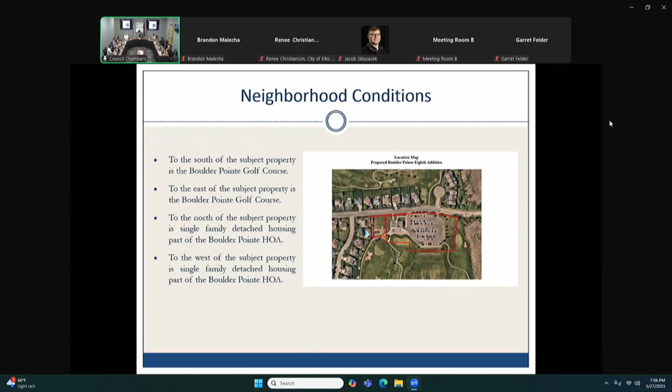Based on the plan submitted, the 2 residential units do meet the minimum lot area, but they're just slightly shy of the required minimum lot width. One is proposed at 80 feet, one at 73.83 feet. That is why a PUD is necessary.

The timeline works so it could be at the next meeting if everything is submitted in time. Another public hearing notice would be sent to property owners within 350 feet of the property, so there will be another notification if there is another public hearing.

Setbacks are required in the R1 zoning district as follows: 30 feet in the front yard, 10 feet on the side, 25 feet if it's a corner lot, and 30 feet in the rear yard. Based on the plans, the proposed development appears to meet the setback requirements. The height requirement is 35 feet in the R1 zoning district, and based on the submitted plans, it does not appear to exceed the height requirements.

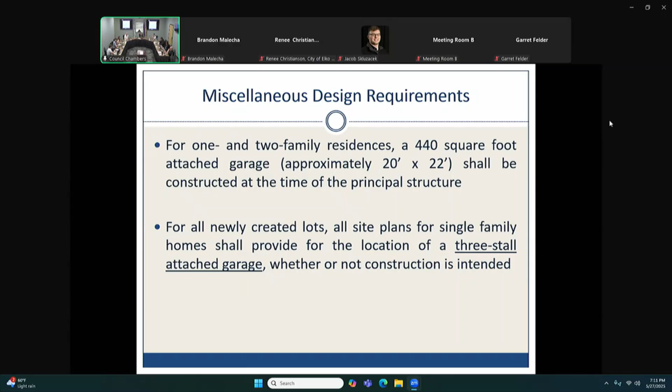The proposed development borders Glenborough Drive on the north side of the development. Glenborough Drive is an existing minor collector roadway, the purpose of which is to collect local traffic and convey it to major collectors and minor arterials. Minor collectors serve relatively short trips at relatively low speeds, and their emphasis is focused on access rather than mobility.

The purpose of a minor collector is to provide a balance of mobility and land use access function. They serve trips that are entirely within the city and connect neighborhoods and smaller commercial areas to the larger network. Minor collectors are shorter in length with lower volumes and lower speeds than major collectors.

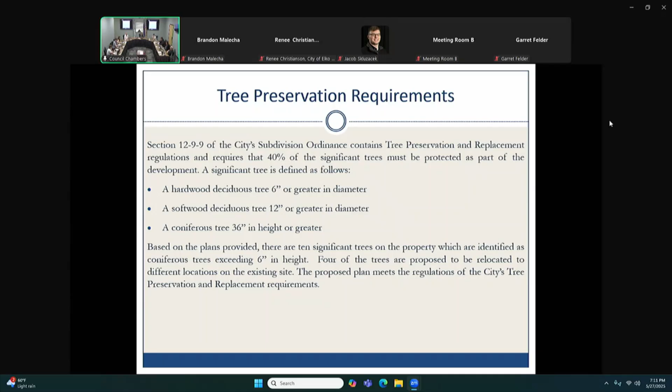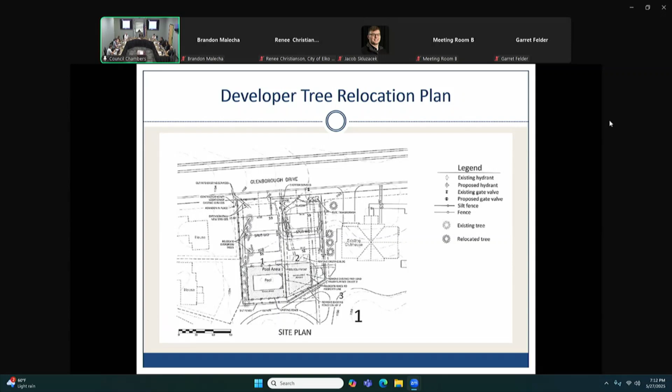City code requires that B618 curb and gutter be constructed with new development. However, that is inconsistent with the existing curbing along Glenborough Drive. So the city is saying the existing curbing may remain if it is in fair or better condition, as determined by the Public Works Director.

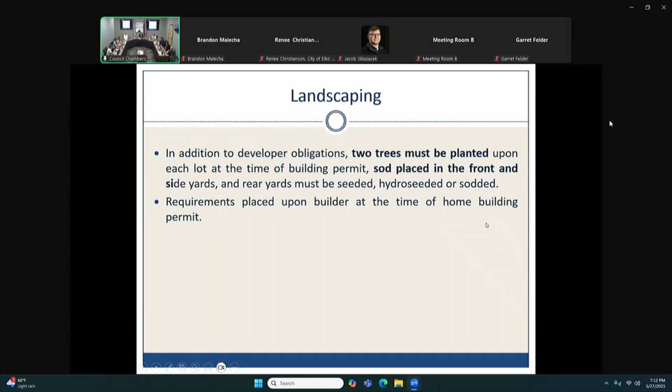Concrete aprons to the right-of-way are required by city code. The concrete aprons must be called out on the plans with a note that the final location is to be shown on certificates submitted with building permits. Code-compliant curb with driveway openings and aprons must be provided if the existing curbing is in less than fair condition.

The city's transportation plan recommends that sidewalks or trails be constructed along all minor collectors, major collectors, and minor arterial roadways. There's an existing trail along the north side of Glenborough Drive, and the city's Parks and Trail Plan does not identify any additional trail or sidewalk corridors on the property other than those already existing. No additional trails or sidewalks are required or proposed based on city code.

The city's subdivision ordinance requires that 8% of the land be dedicated for the purposes of public parks or playgrounds. This was originally platted in 2000, and the park dedication was previously satisfied for the development. State statute therefore does not allow the city to require park dedication for what has already been received for the same property. Therefore, no park dedication will be required for the proposed replat.

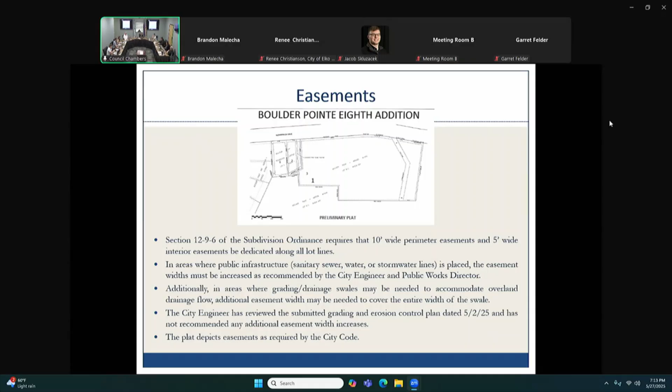It is noted that the closest city park is Boulder Heights Park, which is classified as a neighborhood park. Neighborhood parks serve specific neighborhoods within the city. Boulder Heights Park is the newest park in the city, and it's approximately half a mile from the proposed development, separated by 275th Street East, an existing local road. Other nearby parks include Pete's Hill Park, an open space, historic Elko Park, and Big Windrose Park.

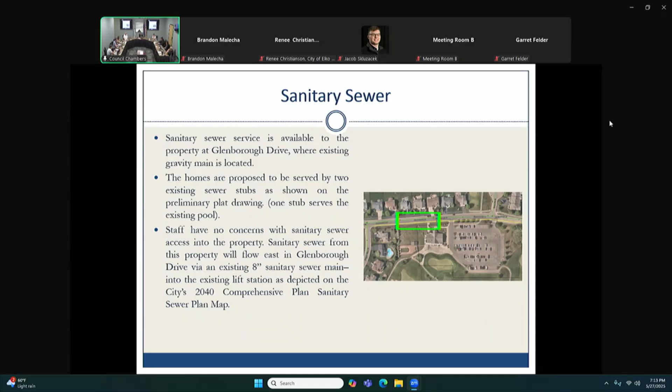Additional comments from the city's engineer, public works director, police chief, fire chief, building official, city attorney, and the relevant school district are included with the presentation here tonight.

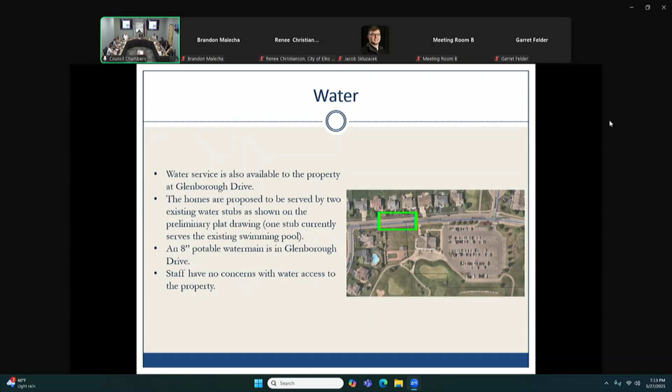Staff's recommendation is for the applicant to apply to rezone the property from PUD to a new PUD district, due to the following reasons. Development of the property as R1 is generally compatible with the surrounding land uses. The proposed development containing 2 residential lots on 0.57 acres meets the intent of the city's comprehensive land use plan, which guides the property as low-density residential.

The required density is 2.5 to 10 units per net acre. 3.51 units per net acre are proposed. Noting that Boulder Pointe 8th will be subject to the R1 suburban single-family residential district, except as follows.

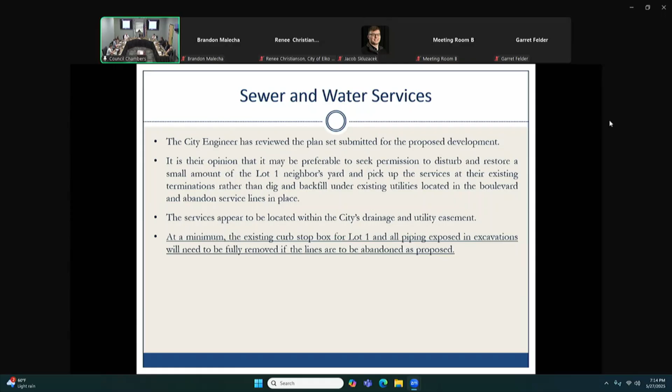Those variations in minimum lot width and minimum lot size are listed here. From the R1 85 minimum lot width down to 73.83 feet at the smallest, and minimum lot size 12,000 square feet down to 11,177.5 square feet.

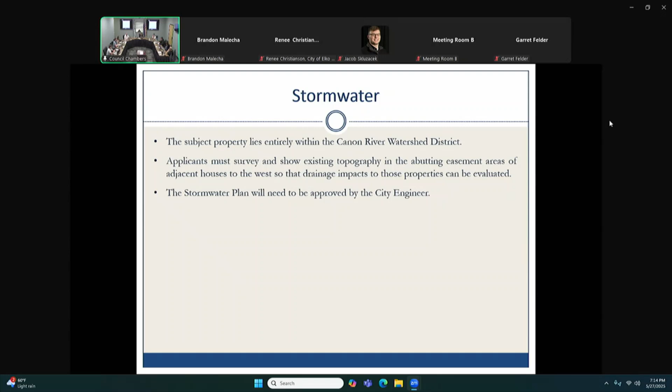The plat should also be developed in accordance with the following plans received by the city, subject to the conditions noted on the red line plans dated May 20th, and subject to the recommendations of the city engineer as contained in his memorandum dated May 20th.

Staff recommend the following conditions for the preliminary and final plat approval of Boulder Pointe 8th Addition, containing 3 lots on 4.59 acres. First, the property would be required to be rezoned PUD due to the proposed lots not achieving the city's minimum lot size and width.

The applicants must indicate how they intend to achieve the intent of the city's PUD zoning district. The city council must then approve the PUD zoning conditions.

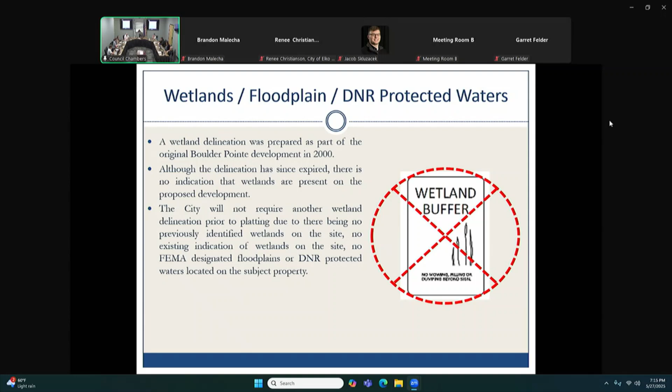Thirdly, perimeter drainage easements must be dedicated on the final plat, along with easements covering the sanitary sewer and water mains serving the development. Grading and utility plans will also need to be approved by the city engineer and public works director, and the requirements of city code pertaining to essential services must be satisfactorily met.

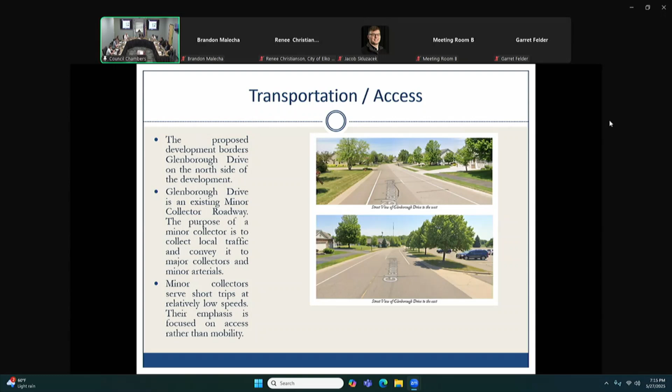The developer shall also work with the postmaster to find an acceptable location for mailboxes. Approval is subject to the city engineer comments and staff redline plans, also subject to recommendations of the city attorney. The developer must enter into a development contract with the city of Elko New Market at the time of final plat approval.

Construction plans must be revised to include a year-round drain tile system and tile connection stubs that can be used for sump pump connections.

At a minimum, the existing curb stop box for Lot 1 and all piping exposed in excavations will need to be fully removed if the lines are to be abandoned as proposed.

The side yard and perimeter grades must be detailed with spot elevations at property corners and high-low points, as well as drainage arrows and percent grades to facilitate building permit review and final lot grading approvals. Finished grades at key points on the perimeters of the house and the pads must also be provided.

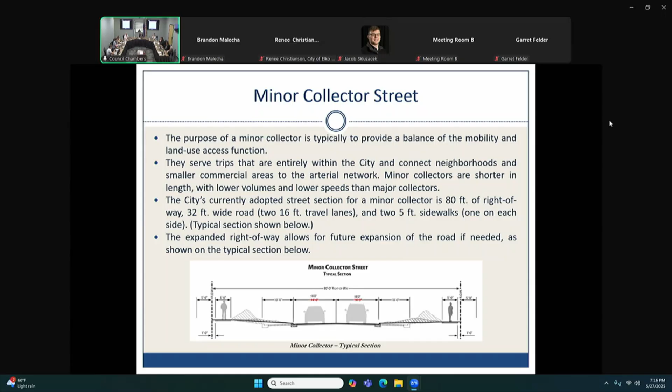Survey and show existing topography in the abutting easement areas so that drainage impacts to those properties can be evaluated. And lastly, existing curbing may remain if in fair or better condition as determined by the public works director.

Notices of the hearing were mailed to all properties within 350 feet of this property. Notice of the hearing was also published in the newspaper, on the city's website, and on social media. Staff encouraged the public to submit comments prior to the meeting.

So at this point, staff will recommend that we open the public hearing. Anyone wishing to address the commission via Zoom may raise your hand using the Zoom feature. Staff will individually call on those waiting to address the commission, and you will be unmuted. Those in person will be called on first. Once unmuted, please state your name and address for the record prior to addressing the commission.

State your name and address. Once you have finished addressing the commission, you will again be muted. When all questions and comments have been received, the public hearing will be continued to a future meeting for the updated rezoning application.

Okay, Madam Chair. All right, thank you, Jake. Thank you, Renee. All right, I'd also like to make the comment, I'd like to be mindful of people's time. You know, keep track of like 2 minutes if you could keep your comments so we can keep everybody on track and hear everybody out.

So I will open the public hearing at 7:22 p.m. Please come up to the podium and state your name and address for the record if you'd like to comment on the Boulder Pointe 8th addition.

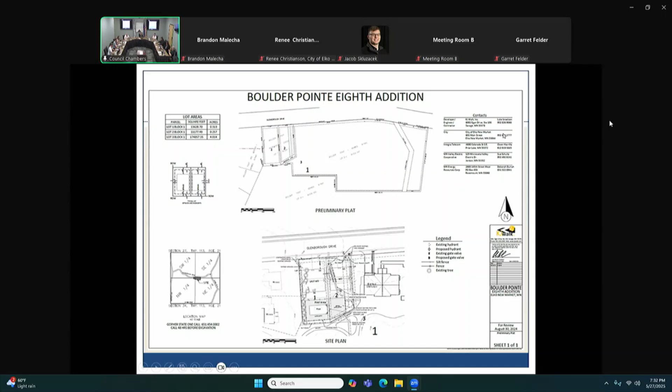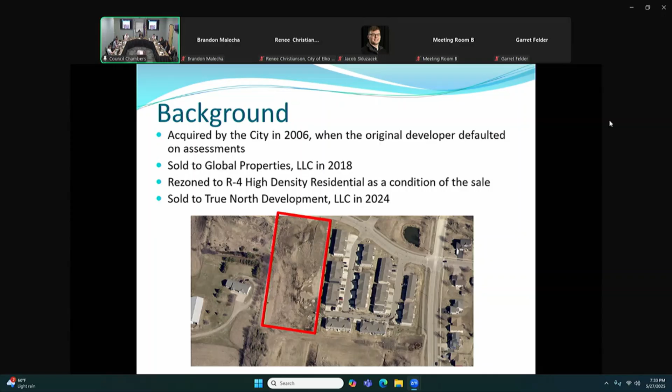No additional sidewalks or trails are required for the proposed project. An existing trail is located along the north side of James Parkway. No identified sidewalk or trail corridors are identified throughout the subject property on the city's 2040 Parks and Trail Plan.

Land dedication of 8%, or a cash contribution of 8% of the undeveloped property value, is required at time of development for the purposes of public parks. Input will be sought from the Parks Commission regarding whether they will seek cash in lieu of park dedication for this property. Staff notes they reviewed an apartment plan for the site in 2016 and recommended cash in lieu of land dedication.

Nearby parks include Wagner, which is the city's largest park, Whispering Creek, and the Eagle View School facilities, which are not city-owned.

10% of the site shall be usable open space, with either active or passive uses counting toward this requirement. The developer must identify 13,896 square feet within the development to fulfill the requirement. Square footage of the play area depicted is unknown based on the plan submitted. Any proposed playground equipment, as mentioned earlier, will require city approval for safety and durability.

The city engineer has responded to staff's request for review, and his comments have been incorporated into this presentation and his city engineer memorandum dated May 20th. The Public Works Director has also responded, and his comments are included in the memorandum. The Building Inspection Department recommends no less than 20-foot setbacks between buildings, which is achieved in the proposed plans. There are no comments from public safety at this time, and the fire chief has not yet responded for review. Staff notes the following general comments associated with the applications.

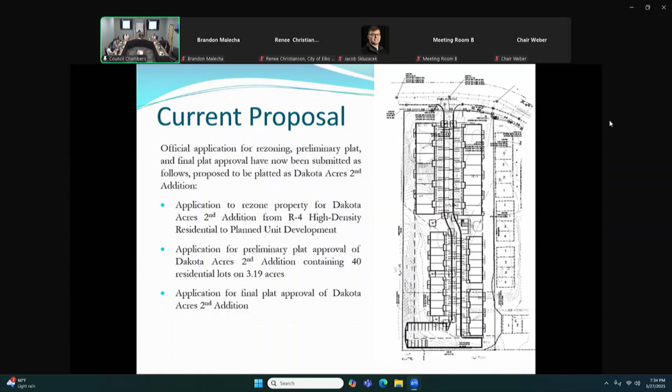Development of the property as R4 high-density residential is generally compatible with the surrounding land uses. The proposed development, containing 40 units on 3.19 acres, meets the intent of the 2040 Comp Land Use Plan, which guides the property as high-density residential, requiring a density of 10 to 30 units per net acre. 12.54 units per net acre is proposed.

Townhomes and condominiums containing more than 8 attached units are a permitted use in the zoning district. PUD zoning will be required for townhomes containing 8 or fewer attached units, and also for those townhomes that do not achieve the city's minimum requirements. Further input will be sought from the city's Parks Commission regarding the desire for land versus cash in lieu of land dedication at their June 11, 2025 meeting.

The landscaping for Dakota Acres Second must exceed the minimum city landscaping requirements by no less than 6%, shown at 8%. Garbage receptacles shall be stored within garages or fully screened from view. The developer shall work with the postmaster to find an acceptable location for mailboxes. Ground level patios with privacy fences shall be constructed on all adjacent rear yard patio areas, and an in-ground irrigation system is required for the entire property.

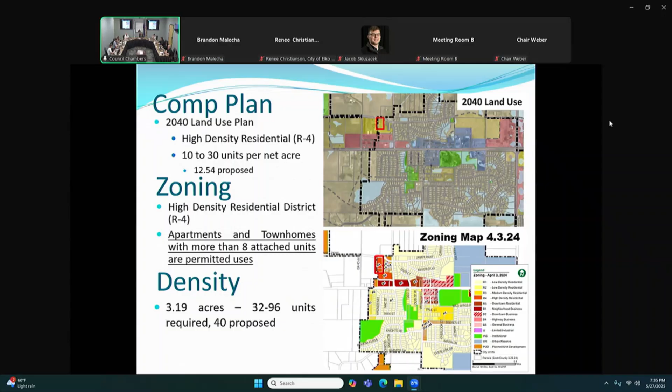Staff notes the following conditions related to the preliminary plat. The exterior of townhome dwelling units shall be composed of a minimum of 25% Class 1 materials on the front facades. A lighting plan is required.

Perimeter drainage and utility easements must be dedicated on the final plat, along with easements covering sanitary sewer and water mains serving the development. Grading and utility plans will also need to be approved by the city engineer and public works director.

Parking shall be provided based on the feedback received from the Planning Commission regarding the PUD zoning at the December 17th meeting. The plan submitted depicted a total of 135 spaces, of which 58 are enclosed.

The plan submitted lacks 1 required guest parking space. Additional support is required for the reduction of the additional guest parking space.

Ownership over all the common elements of the development, specifically the private road and play area, shall be under the ownership of just one association.

Any connection between the proposed private drive Oriole Street to the adjacent townhome development, although not currently proposed, would require an agreement and cross easements with the adjacent homeowners association.

The developer also must identify a minimum of 13,896 square feet for open space within the development. The plan submitted depicts an outdoor play area in the middle of the proposed development with unknown dimensions.

Staff are asking the Planning Commission to hold a public hearing for rezoning and the preliminary plat as required by Minnesota state statute. Following that public hearing, staff will be seeking a recommendation from the Planning Commission regarding the official applications for rezoning and preliminary plat approval, submitted as follows: proposed to be platted as Dakota Acres Second Addition.

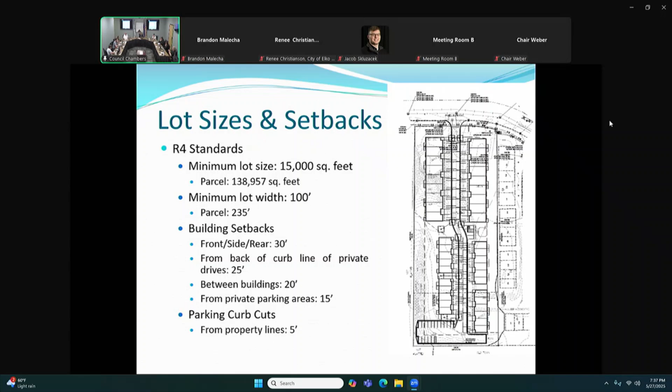James Miner, 25955. I just want to make sure the same builder is not building these townhomes as built to last. I just did about $6,000 in repairs to my unit. Sorry, I'm a little emotional because it's a little irritating. Just about every unit in that complex has had to have a fix of over $1,000 in damages. When we went after the builders to have them come through for a 1-year walkthrough, we were ignored.

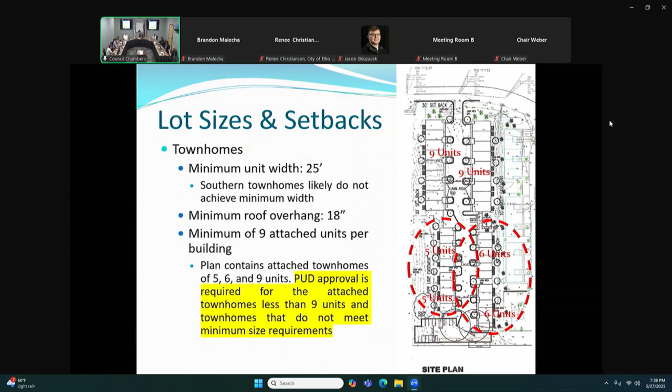It's almost got to a point where a military lady moved in. COVID took her out of the military, and the government is actually seeking action against them. We're trying to see how far it goes before we actually do anything. It is wrong. They screwed a lot of people, a lot of pissed off people there, excuse my language.

But we didn't deserve it. We've been left in the dark. You guys have heard a lot of our calls. I know we've talked to you a lot.

Our land isn't even finished yet. They haven't done what they said they were gonna do with ours, and you guys, I would force them to sell the property and not allow Larry to build anything. Because he's already proven his partners aren't worthy, and the roof damages that are coming up on most of the buildings - I had $6,000 in water damages on my house, and it was built in 2022.

It's not right, and there's nothing that I can do. My insurance is looking into it to see if I can go after them, but I don't even know who to go after. Bear Construction doesn't exist. Dave doesn't answer his calls. Larry doesn't answer his phone.

Joe, good luck. We took the HOA from a negative place, and we actually have a surplus now. We did it right. We had to raise the dues that they refused to, because you can sell a house a lot cheaper or a lot better with low dues. They weren't enough to actually cover costs of the HOA. We're gonna be raising them again to replace driveways, fix the roads that they put in.

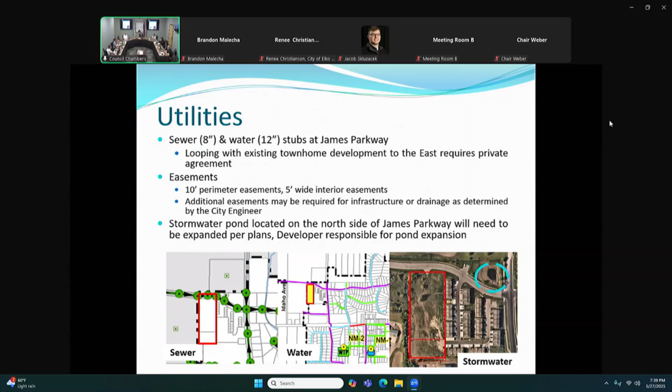Honestly, any conjunction of the new build and us - yeah, you pay us $100,000 to fix every unit in that HOA, and yeah, we'd consider it. Other than that, there's not a chance that they will have any access to that road. That's it. Thank you, guys. Thank you.

Maria Fregis, 25490 Texas Avenue.

I have a question. It was stated for the Dakota Acres Second Addition that there was a previous wetland delineation that showed no existing wetlands on site, but it's considered expired. I was curious if the LGU, local government unit, or the Soil and Water Conservation District made the decision to not need another wetland delineation, or if that was done administratively.

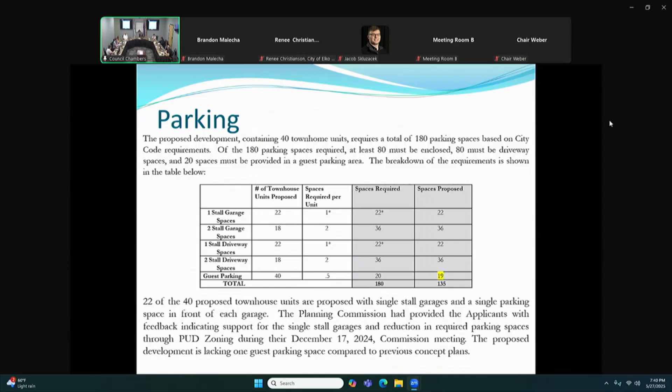The city is the LGU, so it was done in consultation with our wetland advisors. Okay, just curious, because there is a 5-year expiration date on those decisions, since wetlands can change over time, so I just was curious if that was made by the LGU or not. Yep. Okay, thank you. Thank you.

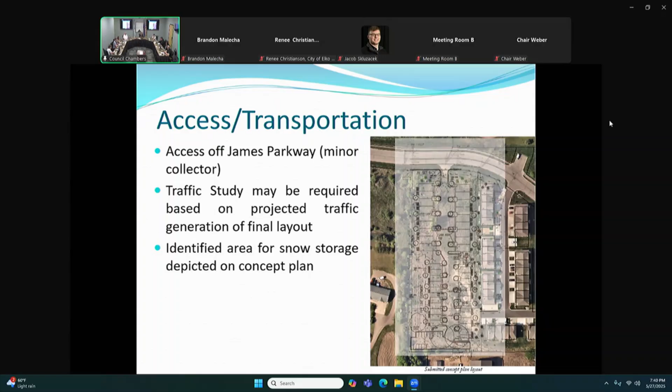Anyone else like to comment on Dakota Acres Second Addition? Please come forward, step to the podium, state your name and address for the record. Anyone online? No. Okay, I will ask a third time. Anyone want to comment on Dakota Acres Second Addition? No. Okay.

Developers are here if they wanted to add anything.

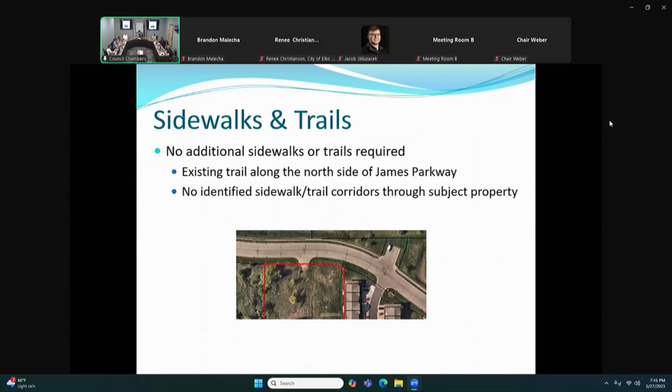My name's Alyssa Cheeky, 3250 90th Avenue, Northfield, and I'm one of the partners in True North Development. He left, I wanted to answer some of his concerns, but I just want to make it clear that none of the previous owners from the first development are involved in this one. Also, regarding the association dues, that will be handled by a third-party company, so we won't have that same issue that happened last time. I'm happy to answer any other questions.

All right, I will close the public hearing at 7:42 PM.

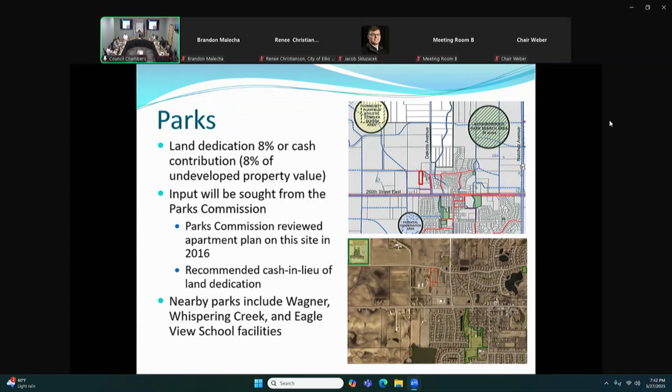At this point, we're asking the planning commission to recommend the applications for rezoning from high-density residential to planned unit development, and consider the application for preliminary and final plat approval for Dakota Acres Second Addition. So moved. Are we gonna have a discussion on anything? Don't we vote and then have a discussion? No, discussion first. Okay.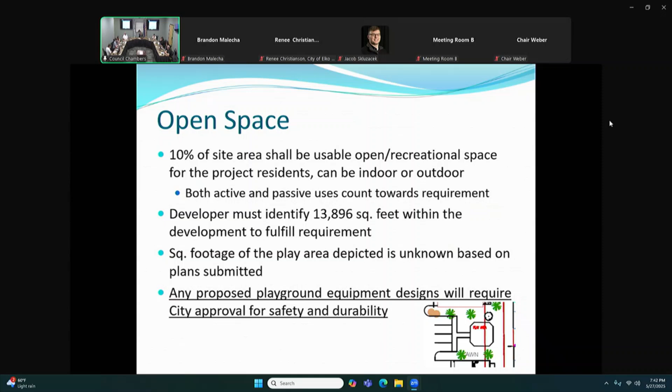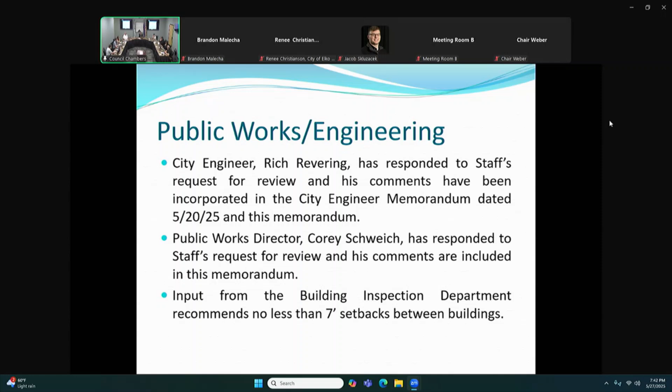I appreciate the fact that this is a different housing style and option that we currently don't have in the city. Housing is a struggle for many people right now, and affordability is a crisis, and I appreciate that we have a housing style that isn't a huge single-family home with a three-car garage. I also appreciate that the developer came forward and explained that the original developers of the townhomes directly east of this proposed development aren't part of the equation anymore, because hearing what was going on raised a lot of concerns for me, so I appreciate that was clarified.

I like that they reserved some area for turnaround if the garbage trucks or whatever come in and out. I hope they paint those areas as no parking, because I could envision people wanting to park when they see a big open spot. Is there a reason in the northwest corner they can't add one or two more spots there? That was actually the one they subtracted, in the southwest corner. So they could more easily add one in the south. Yeah, just wondering about the same parking area.

They notched this out, what is that for? Oh, that's so they can get the snow stuff out. That's the old plan, that was the one they presented. Oh, okay, so they have a more recent plan than that. Okay.

I'm a little confused, I don't know if I was on the commission at the time. So the developer with the existing townhomes is the same person? There's three different property owners, or of the other development that this was a portion of, I believe. The first builder built two houses, then went out of business, and then developers bought it from the city years ago and developed part of it. Okay.

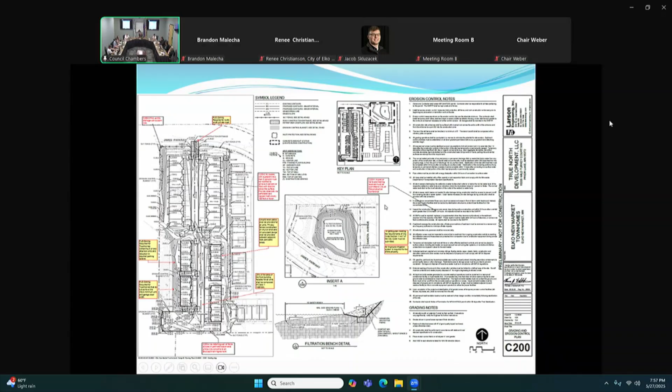Miscellaneous items: neighborhood meeting. The city did request that the developer hold a neighborhood meeting prior to this meeting to introduce the project to the neighborhood. It was held last Wednesday at the library. Some city staff members attended the meeting, which was hosted by Tamarack Land Development, and resident questions at the meeting related mostly to drainage, the ghost plat showing the adjacent properties to the north, screening, traffic, and the location of a planned roadway connection to the north. And the county wanted to point out that any work done within the county will require a permit from Scott County.

So the ghost plat - the preliminary plat shows a conceptual layout of the approximate 80 acres to the north of this parcel. A ghost plat is an additional requirement laid out in our city code, submitted with each proposed development for the purpose of ensuring proper roadway alignments in the event of future development, but it does not indicate city support or approval.

The concept development plan showing properties to the north does not indicate approval or support of the specific layout, but rather shows the potential for future development based on planned roadway and utility alignments within this proposed development. Staff recommended, and city code requires, that the developer provide this ghost plat to demonstrate that cohesive development between the parcels could occur. City growth only occurs when a willing seller sells land to a willing buyer. The timing when a landowner wants to sell is not controlled by the city. The city plans for and prepares for growth in order to promote orderly development.

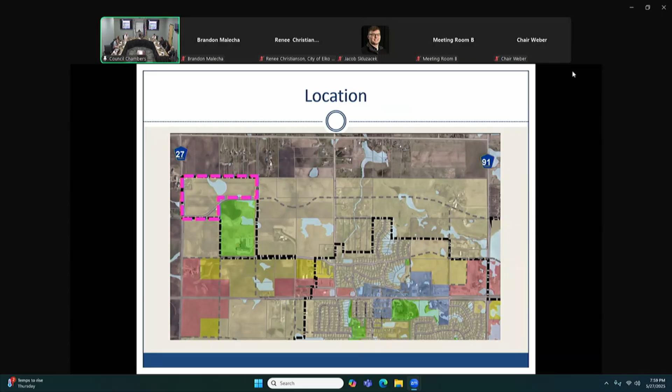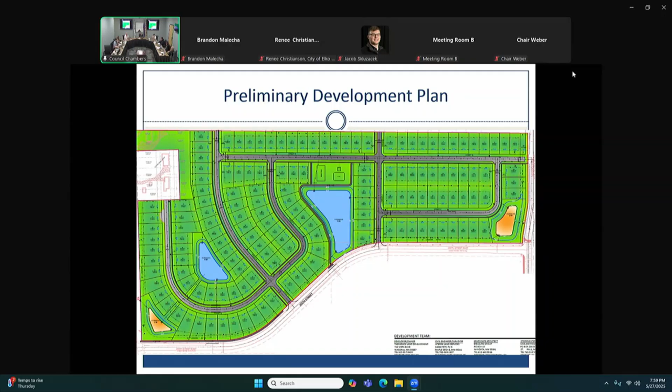Continuing on with traffic, staff has no knowledge of major operational issues at the existing County Road 27 or County Road 2 intersections. The police chief indicated that they do not see a lot of accidents there. There is an existing northbound right turn lane and a southbound bypass lane on County Road 27 at the intersection with 255th. Turn lanes allow vehicles to safely decelerate before turning without obstructing traffic, and bypass lanes allow vehicles to bypass other vehicles that are slowing down or stopping prior to turning. The Scott County Highway Transportation Services was notified of the proposed development and has provided comments.

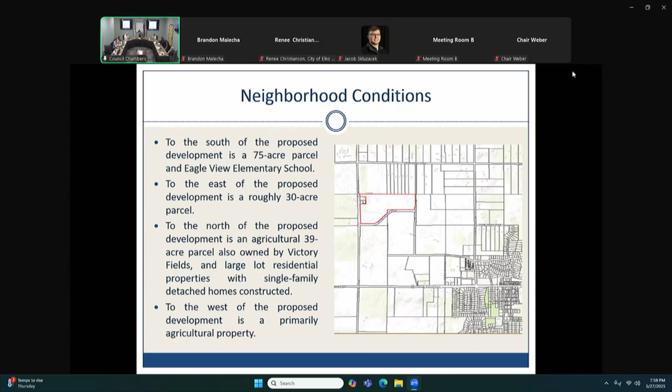Traffic generation or impacts to the county road system were not identified as an issue. Staff consulted with the city's traffic engineer regarding impacts of the development, and the following feedback was provided after running the anticipated traffic through traffic modeling software. With the 2024 traffic volumes and anticipated traffic added to the intersection, they did not see a concern with the capacity of County Road 27 or at the intersection. Acceptable intersection levels of service are anticipated during peak hours.

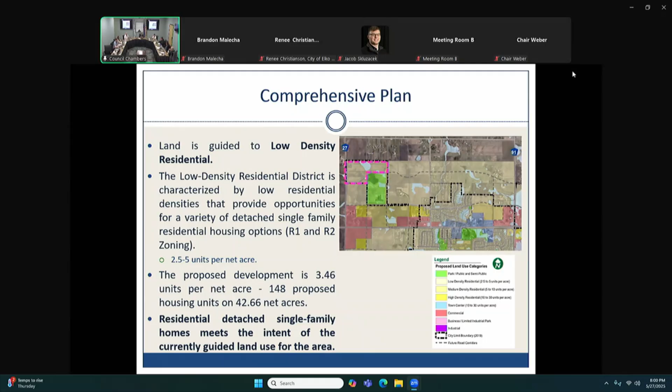The modeling assumed all traffic from the development would go to and from the intersection in order to be conservative, and assumed none would go out to the east. Scott County's 2040 comp plan shows their capacities for a two-lane highway are well above what this development would add, which aligns with the county not having any comments or concerns on this.

Additional comments: the city engineer provided us a memo, and his comments are in there. The Public Works Director's comments are incorporated here. The City Attorney didn't have any comments right now. The Police Chief did want to add just another caveat on that intersection - to keep the view unobstructed at the corner of 27 and 255th to ensure proper sight lines for traffic.

If any traffic control devices are needed in the neighborhood, specifically at the intersections of Street A and C, which is kind of to the south near 255th, use yield signs in favor of stop signs. The fire chief didn't have any comments, and the building official didn't have any comments.

The school district - this is anticipated to add roughly 81 students to the school system once it's fully developed, which is great for New Prague. Newmarket Township board members were notified of the application and have not submitted any comments to the city. All of Scott County's comments were included in a letter, and they are attached to this report.

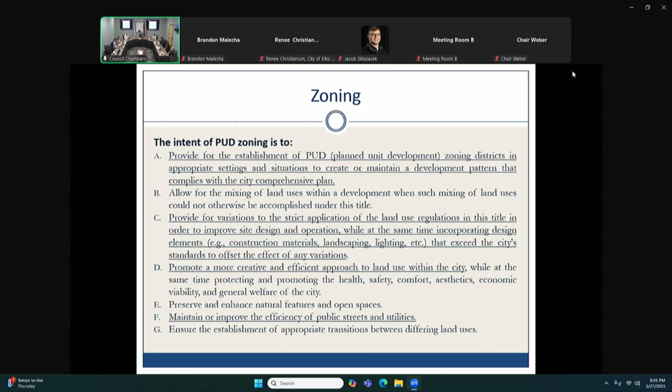So the actual request to the Planning Commission tonight is an application to rezone 50.87 acres to PUD zoning, and an application for preliminary plat approval of Highlands at Eagleview containing 148 lots on 50.86 gross acres.

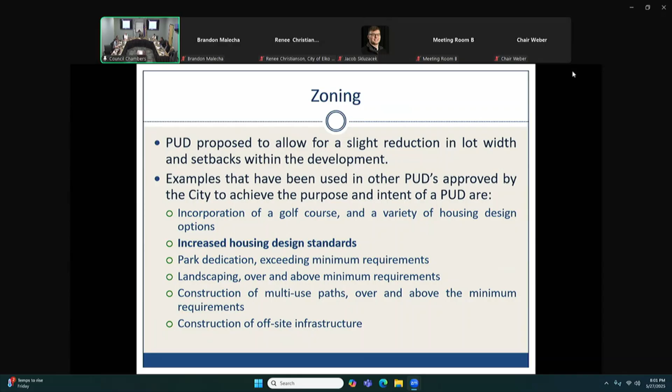So staff recommendation, bear with me here. Staff recommends rezoning the property to PUD. It is consistent with the comprehensive plan, which guides to low-density residential. The proposed use of the property for single-family residential development is compatible with present and future uses of the land area. The proposed use and development of the property complies with performance standards contained in the subdivision ordinance and zoning, except as specifically identified in the PUD. The proposed residential use of the property can be accommodated with existing public services and will not overburden the city's service capacity at all. Traffic generation by the proposed development is within the capabilities of the existing infrastructure.

Related to the request for preliminary plat approval, staff would also recommend approval for the following reasons. Development of the property for single-family residential homes is consistent with the land use plan and meets the density. The proposed plat is consistent with the purpose and intent of the 2040 comp plan and standards contained in the city's zoning and subdivision ordinance, except for deviations specifically approved through the PUD. Development of the property as single-family residential is compatible with adjacent land uses.

Staff recommend approval of the request for preliminary plat with the following conditions. Preliminary plat approval is subject to the approval of all wetland applications, including wetland boundary and type concurrence, and approval of the wetland replacement plan if required. The developer must enter into a development contract with the city at the time of final plat.

The preliminary plat is issued for a period of 1 year and shall become null and void without further action from the Planning Commission or City Council unless the final plat is filed within 1 year of the date of the City Council granting preliminary plat approval. Preliminary plat approval is granted in accordance with the Highlands at Eagle View's preliminary development plans dated 5/2 containing 23 sheets, the Stormwater Pollution Prevention Plan, and the Stormwater Management Plan.

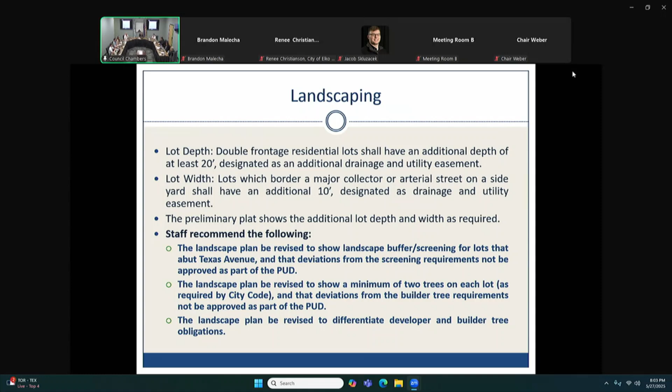A trail bench should be graded for a future trail along Texas Avenue. If it can't, it should be graded at the back of individual lots with a trail easement. A combination of parkland dedication and cash contribution will be required to satisfy the park dedication requirements.

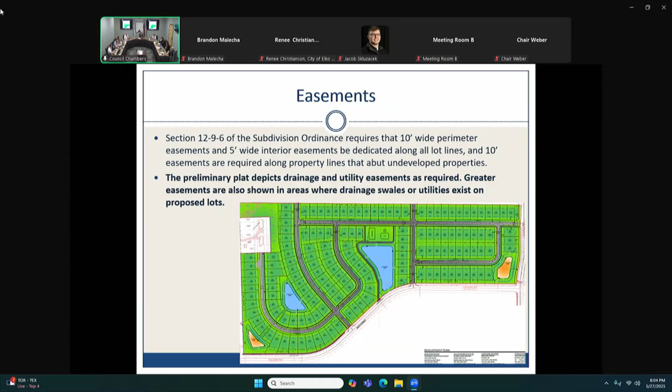I'll add a little context to this one. Condition 13 requires a fence to be constructed on the northern boundary of Street E to mitigate concerns of headlights for the neighbors to the north. This came up quite a bit at the neighborhood meeting last week. Staff's recommendation is to construct a fence so it's immediate - we don't have to wait years for the trees to grow, and it won't cause a problem for the neighbors to the north.

As Jake said earlier, if there's anybody online, please raise your hand and we will get to you after everybody in person speaks. We're ready to open the public hearing. I'll open the public hearing at 8:19 p.m. Please step up to the podium, state your name and address for the record if you have anything to comment regarding Highlands at Eagle View.

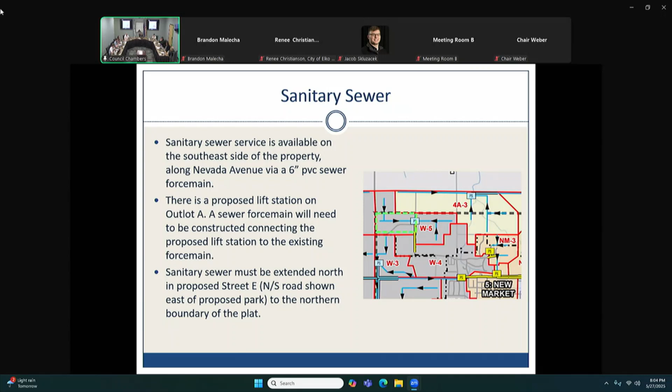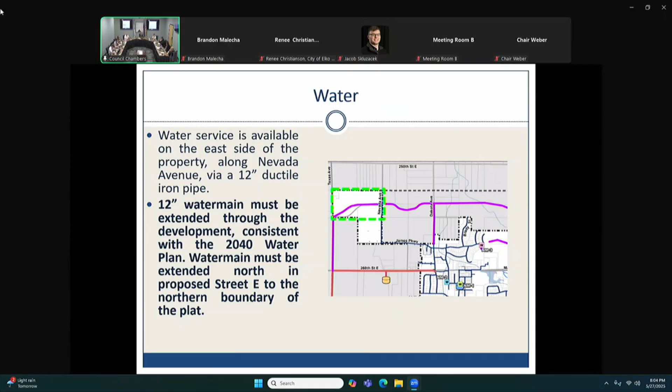Hi, my name is Cheryl Fregis, 25490 Texas Avenue. Can I walk up to that quick? Absolutely, thank you. I know you guys were there last week, correct? And I specifically talked to you about this, this is where it's coming out. That's Texas Avenue, so my house is right there.

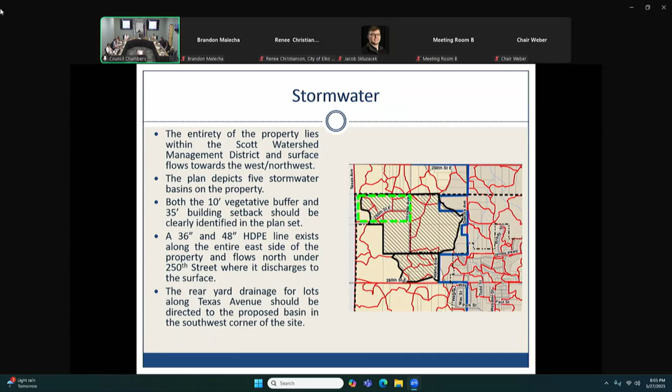So I want to make sure I'm hearing your questions correctly - go along Texas Avenue here. Yep, the ditch is steep. Yeah, it is steep, the hills come down, the hill comes down. There used to be a cattle pass underneath there, which was for water drainage, not like it was for cattle recently. You had said that that was still going to be in place, water would still be draining there. But what I see here though is yet you have a house right to the back end of it, is that correct?

Looks like there was a buffer, I thought. Yeah, so I just want to be clear on that, because most of the concerns the other night were for watershed, and where it's running.

Yeah, absolutely. I guess just a quick introduction. My name is Reed Schultz, I'm with Tamarack Land Development. With me this evening is Nate Herman, he's our civil engineer working on the project.

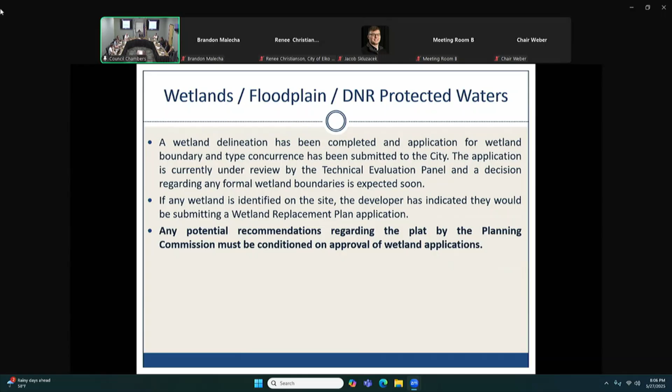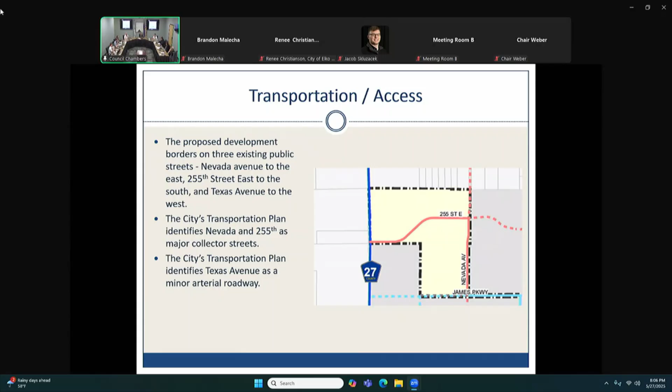First, to answer the questions directly, the cattle crossing, we are proposing to remain in place. We have no plans at this point, or nobody has indicated otherwise that we need to remove that cattle crossing. We are working with the city engineer to ensure that all those utilities are in place, some of that storm sewer crossings and whatnot through there.

Did you want to speak to that? Well, yeah, Rich, you can clarify, but I believe the cattle crossing, I think back in 2005 was actually filled in.

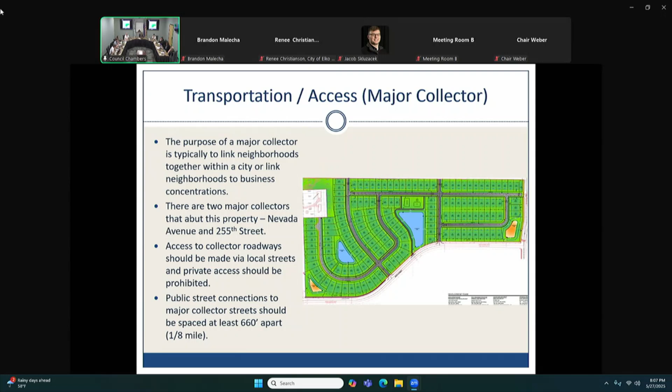Yep, and to address the question, there is a 24-inch corrugated metal pipe that goes underneath Texas Avenue right now, and that's what provides the drainage that heads westward and provides runoff away from the east side of Texas across the street to the west side. That is all within the plans and topography, it's a fairly steep right-of-way or ditch system there. That existing 24-inch CMP is going to remain untouched.

We're really doing everything just to stay out of the county right-of-way with any grading. So we are maintaining drainage flows and just matching existing conditions, not proposing to do any work within the county right-of-way.

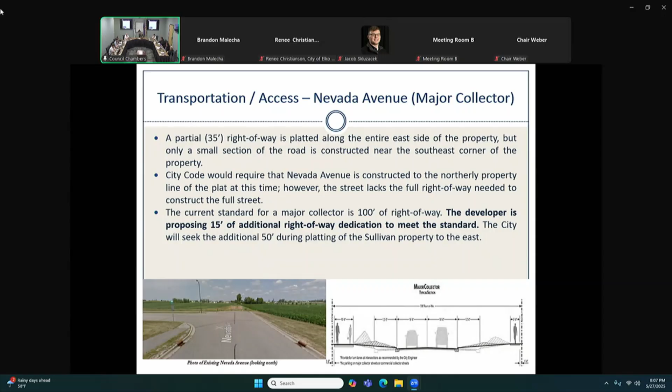Well, my name is Nate Herman. Yeah, thank you guys, I'm the engineer for the project. There was a bench, I think they talked about, right?

Yeah, on that trail, grading the trail, we'll work with city staff on the appropriate placement of where that trail connection is. So there could be some additional grading needed in that right-of-way to accommodate the county's comment on that potential future trail.

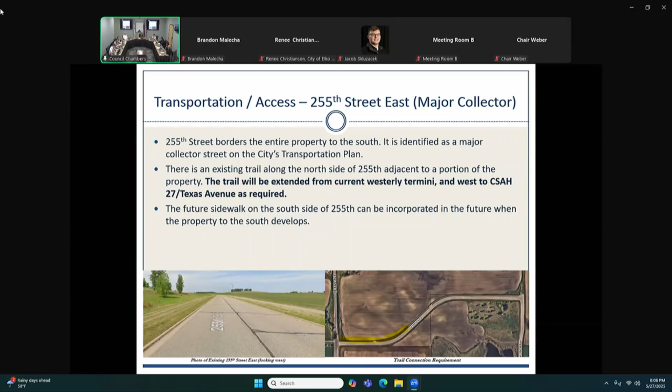As far as lot sizes, the lots abutting 255th as well as Texas Avenue are extra deep lots, so there is the landscape buffer that has been mentioned a few times by city staff. So those homes along Texas as well as those homes along 255th are actually further set back from those major collector roadways. All those homes will have an appropriate backyard, appropriate building pad, and plenty of buffer through there.

So these lot sizes are very traditional lot sizes for national home builders. We're not proposing anything that's smaller or unique than what they build on.

And your property is what, 30 feet at least from Texas? So we are providing a 25-foot landscape buffer, so that'll be a heavily landscaped buffer along Texas and 255th. And then from there, we have our traditional 130-foot, I think, total in those — I guess double frontage lots would be the appropriate term to use when they have right-of-way in the back and right-of-way in the front — at least 150. Then as they come around that curve, they get extra deep through there.

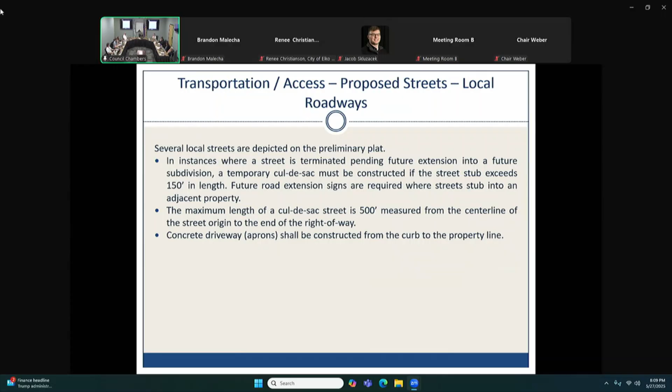Cool, I have a question for the developer. Reed and Nate, could you describe a little bit more for the crowd the location of that southwesterly pond relative to that primary culvert? There's actually two culverts there, but the one you're using is the deepest and the furthest north. Where that pond is relative to that pipe crossing, just to help them understand — I don't think there'll be a house up against that, where that culvert is.

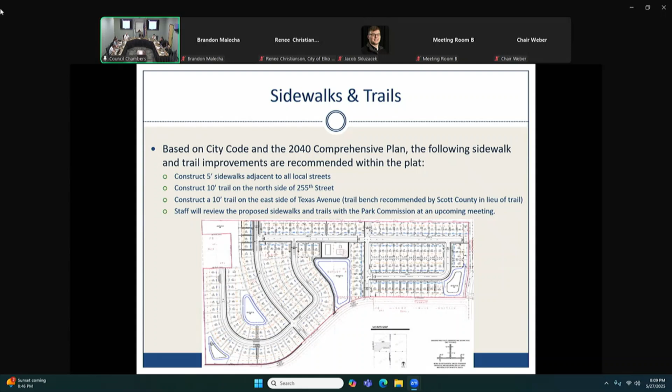Yeah, as Nate goes up there and points to the very far north, right where his finger's pointing — I know it's hard to see from back there — there's a little brown dot here, that's what that's representing. Here's the proposed pond. We have an outlet for the pond, and that's basically outletting right in line with the existing pipe that goes underneath Texas Avenue. So there is a riprap bed down at the base of that pipe, and we are connecting into that riprap system.

Oh sorry, yeah, I wanted to get the view of the room for the audience, but then it took your picture down, so we can put the picture back up if you want to reference it. Let me know if you want to back it up. Go ahead, put it back.

So Rich, does that kind of answer the question a little bit?

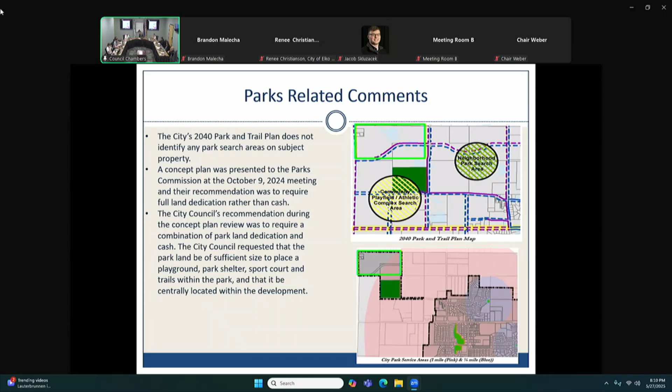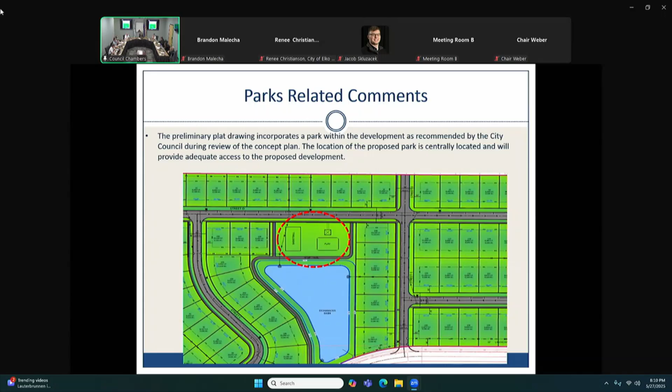Thank you. I will ask again if anyone has comments related to this. Please step up to the podium, state your name and address for the record. Hi, I'm Mary Watchery, and we're at 7371 250th Street East.

I think you all need to know we are part of the township, so we don't have voting rights. Your future plan with this road goes right through my property and my neighbor's property. They were unable to be here tonight.

They've got their kids' baseball games. When we talked about it at the last meeting with the developer, we asked for the road to potentially end and become a house there or be a green space. When you look at the signs by Nevada where it stops now, they've been there for 20-plus years. It's kind of an eyesore to look at.

We've enjoyed living out in the country. We knew development was coming, but we've enjoyed country life. And having all of those headlights coming into our property, and then to see the city proposing basically a cul-de-sac, two cul-de-sacs in our property in the concept plan.

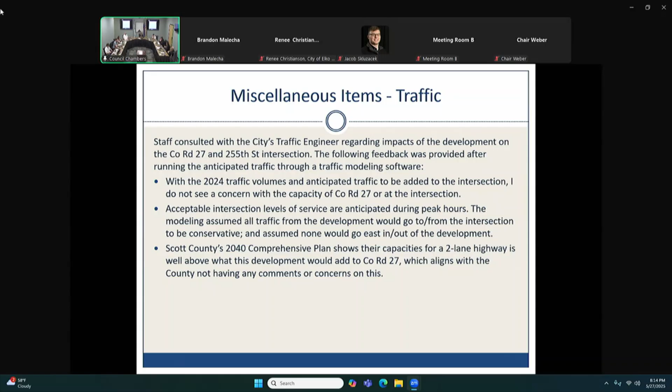So, lots of concerns with the grading of the property. When you look at the existing housing, they're way up on the hill. And even that northwest corner, that vacant 40, that's way up on the hill. So we're going to have to really watch grading for that, or we are going to get flooding again.

Would you like a response? I certainly am aware of your concern and have been for 20 years since I started working. There's drain tile everywhere.

And the developer's also pretty well aware that any drain tile draining into their site has to be maintained with continuity to another system so that it's not plugged. It can keep flowing to drain any properties off the site that are depending on that tile. It may not be that exact drain tile going through - they might connect into a pond, they might connect into a storm sewer system, but continuity has to be maintained. So especially when they're doing any excavation at the perimeters, not only are we going to be looking for the tiles that we have on the map, we'll also be watching the excavation for any that are found.

Okay, and I would add for the crowd, if you know of any tiles that we're not aware of, we can put that map back up. It'd be extremely helpful if you point them out to us now, so we can at least make a scratch mark on the map and be looking for those. I don't know who's driving, if that's not inconvenient, put that tile map up. We might as well see if there's any we're missing. We got that map from, I think it was from Andrew, years ago. Okay, thank you.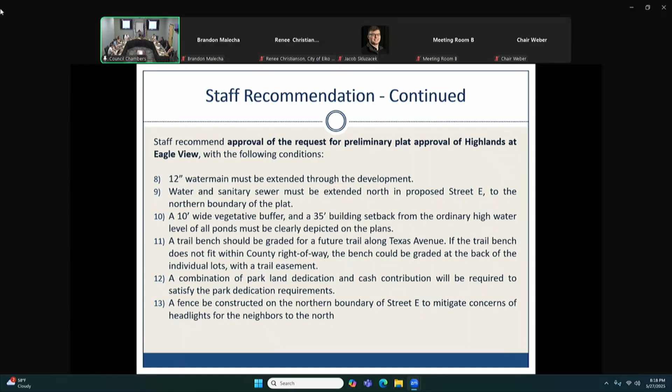Were you also putting a tile, I think, on that north border to go to that eastern pond? It'll either be storm sewer or tile, some kind of pipe, adding something in there. Yes, sir.

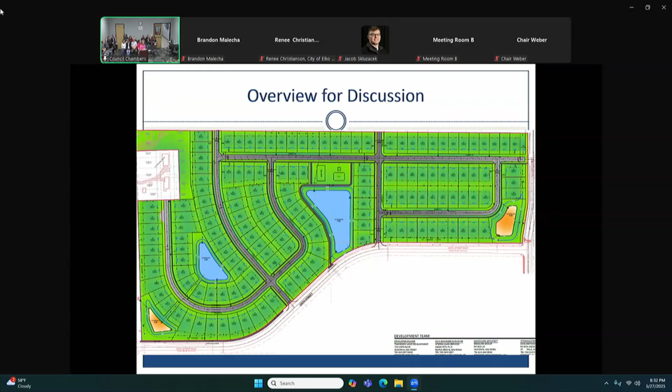And I know you were talking about the drain tile - the whole thing could either connect to storm sewer or potentially to the basins directly. With that being such a low area, is the idea just to leave that as is, or potentially route it up the hill to that basin?

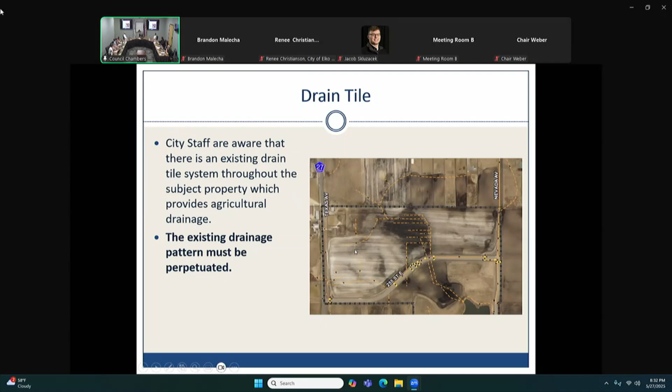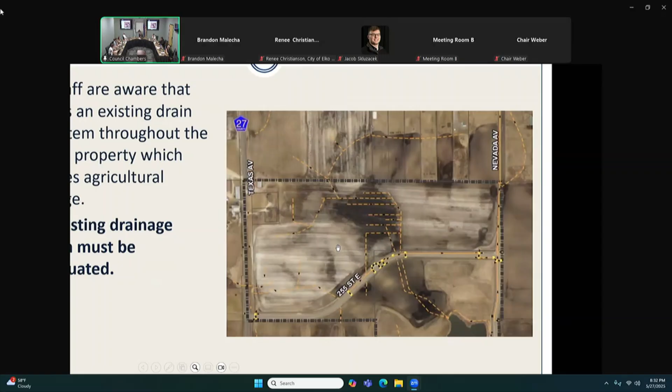As far as preserving drain tile on this site that flows off of it, we don't worry about that, because there'll be a new drainage system. We're concerned about drainage coming onto our site, that we have to pick up and keep. So there might not be any - there'll be some tiles for backyard drainage and sump pumps, things like that.

But as far as the existing tile on the site, I would guess that'll mostly be obliterated.

Do you mind me asking, I'm guessing that pond will outlet at the 100-year event, maybe? It'll outlet at every event, but at different rates. Small rain, a little outlet. Big rain, more outlet. But in all cases, it's designed to be less than the existing flows at those same storms.

Do you mind me asking what the storage capacity is proposed versus the volume of runoff going out during each of those events? It's okay if you don't know off the top of your head. I just look at the numbers and they're all smaller on the proposed column and I turn the page.

Nate might be able to pull them up, or we could look them up, or take that up tomorrow if you want to email. Yep, I can definitely reach out directly. I'm just curious with things outletting at different points, making sure they comply. Basically 3 points, and in all cases where water's leaving this site, it's meeting those criteria, and we can get you those numbers.

Because I don't know, and you might find out more with the wetland delineation, Army Corps. I know they're really looking at on-site, but are they happening to look at off-site impacts, potential bounces to that? I mean, it is a creek that leads into the Vermillion and South Creek and everything like that.

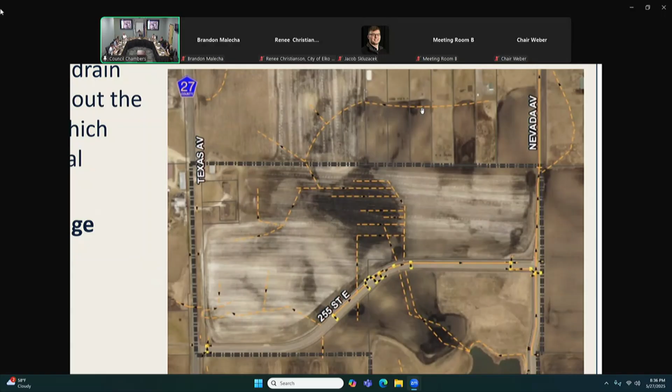And from your conversations, sorry to keep going on this, did the other TEP members not have significant comments, or were there some concerns with the site? I think it's largely extents. I didn't see significant comments from my observation, just really trying to decide where that boundary was. And it's a bit difficult when it's in the middle of a farm field.

Nope, I appreciate it. Again, do you mind if I reach out to staff directly to walk through some of these things if I have additional questions? Some of these are very small numbers as well. I can't see that far. Absolutely.

Please contact us. We will put you right in touch with our wetland specialist at Bolton & Menk that represents the city, Dan Donaire. Jake's going to grab a card for you. Thank you very much. And then we can submit these plans to you too, so you can see the basins and the elevation.

Can I ask if you have specific concerns, or are you just looking for information to decide if you have concerns? I'm looking more, I do have some specific concerns, again, with those basins and the drainage that's being directed towards them, how they're outletting, especially with the existing drainage and drain tile. Our concerns are with past experience of watersheds changing, and I know development changes the land use anyway, but really making sure the downstream impacts are addressed.

If, for example, I'm not sure how all the drain tile is routed right now, where it all goes, can't see that on the map, but if that southwest basin is taking a lot more of the drainage, the stormwater from the streets, from the runoff, and collecting it. I know it's a filtration basin, so it will outlet at different rates during different storms. Hopefully a lot of it will infiltrate back through the soil, potentially back through the drain tile. But all that goes into the creek, into the wetlands, into the slough further west. And if there's less water being directed towards that, then that automatically changes how that wetland, how that slough lives, how the hydrology of that works. So that's a big concern I have.

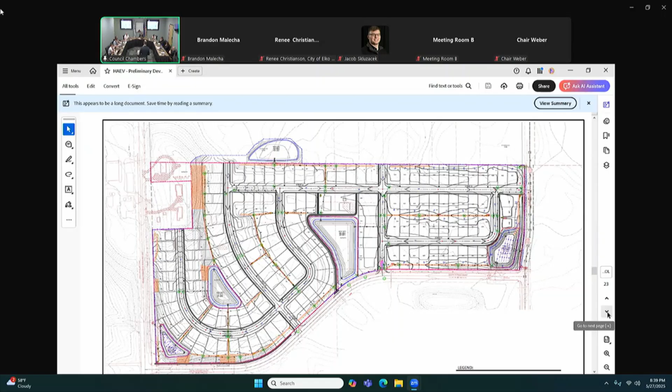With these tight soils, you can't soak much into the ground, and that's why the filtration at least slows it down, improves the quality, doesn't increase the temperature. So there are benefits to filtration, even if it's still leaving the site. I think you'll be satisfied through the stormwater report and talking to the wetland specialist, probably more the stormwater report. We'll get that to you. The actual stormwater report is very lengthy with a lot of text. It's not included in the packet, so we'll get that to you. The first 3 pages are all... It's all good. Awesome, thank you very much.

I really appreciate it. Thank you. Thank you.

All right, questions, comments from the commissioners? We've seen this plan, probably what, Renee, 15 years ago this came in? 2005. Okay, 20 years ago then. So I don't know if a lot of the homeowners were the same ones that were here before, but I remember it was a development back then. It was going to happen, but it never did because of markets changing. So it's not new, I don't believe.

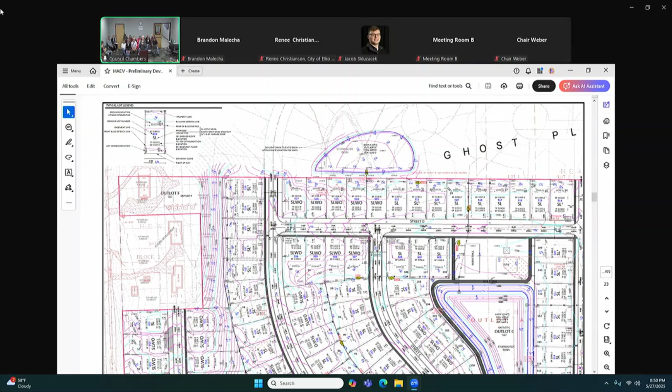So before we go into the other things, if you have any questions, or Lars, if you'd want to speak, the floor is yours. Well, let me stand up there and give my name. Sure, no one else wants to talk about garages, I guess.

My name's Lars Forsman. I live on 26330 Thomas Avenue in Elko, and we have a 4-acre size lot. You covered pretty much everything I was going to say. I'll just add that I think it's a pretty good benefit to the community to have a garage door this size, so we can get those larger motor vehicles inside a garage rather than sitting next to it or having to pay to store them somewhere else.

That's really all I had to say. I don't plan on exceeding the square foot requirement—I'm happy with the size of the shed. But having a 14-foot door is going to be a selling point for the house when I do sell it someday, and very valuable. I think the community would see kindly upon it as well. So if there's any questions, let me know.

The number before, the 24-foot? It was 20. 20 is the current maximum height. So the request is to increase that by 4 feet, to allow for the garage door. Then the second part of the request would be to remove the language stating that the accessory structure shall not exceed the height of the primary structure for lots greater than 1 acre.